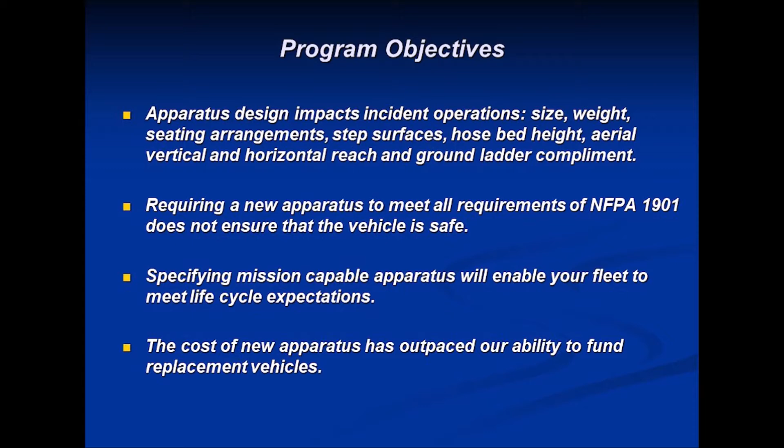Finally, the cost of new apparatus. Historically, fire apparatus have increased in cost about 3 to 4% each year. Starting in 2005 with EPA requirements and changes in diesel emissions and particulate products from the exhaust system, apparatus between 2005 and 2010 increased probably 8 to 10%. And as a result of the pandemic, a lot of the apparatus component parts we're using are exceedingly difficult to get due to supply chain issues, so the overall cost of your unit, as you'll see shortly, in some cases has outpaced our ability to fund it.

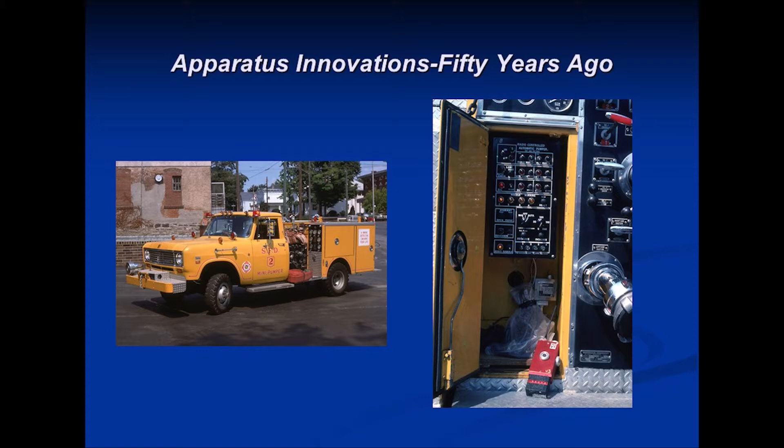The image on the right is something that was developed between the city of Syracuse and Fire Research Company, where the chief of the department, Chief Thomas Hanlon III, worked with the late Jack McLaughlin to develop a radio-controlled pump with a hand transmitter that, as each attack line came off, the nozzleman would have that in his pocket and be able to control remotely from inside the building the operation of the valves on the pumper to be able to send the water.

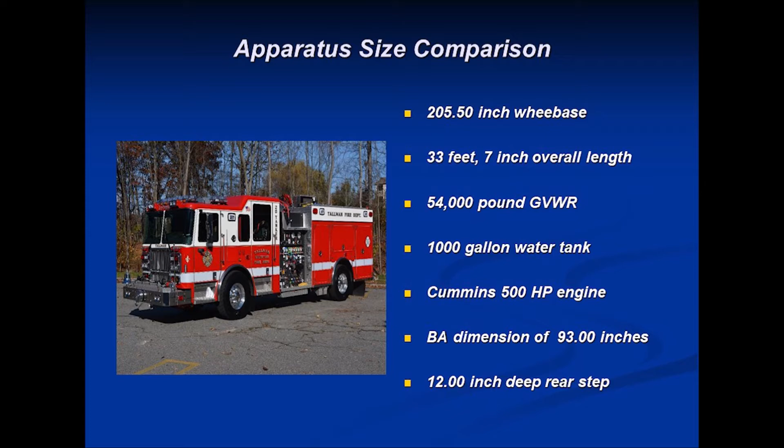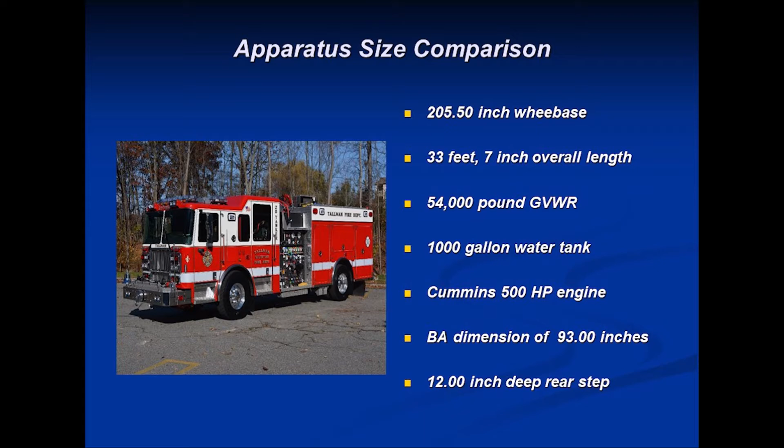A more modern version is slightly larger. Now the unit is just under 34 foot of overall length, 54,000 pound GVW because we want to put more water on it with a 1,000 gallon tank, and 500 horsepower. In an effort to keep the unit short, because bumpers have become extended, we've taken that dimension and reduced the rear step. So in a lot of cases, that rear step isn't something you can even safely stand on when you're going to rack and attack a line.

One of the things from an operational standpoint, Tom, where you're going with all this too, is to look at - bigger is not always better. You need to know your first due area and base the apparatus needs on that area, which is something we're going to discuss a little later on. But again, it's important not to get in that trap that bigger is better. Make sure you're speccing your apparatus and designing it for your first due area and your needs.

If you look at access to social media today, whether it's a Facebook platform or the manufacturer's website, you can look at a vehicle and it might look like it's going to work well. One of my taglines, Chief, is that every fire truck I ever designed fit on an 11 by 17 piece of paper - it looked good on paper. When you go there for the final inspection and go to tape it...

In many cases, just initially working with apparatus committees where they're replacing a 15 to 20-year-old vehicle that was a modest size, because they kind of think this is the physical size of the vehicle we need, I've done nothing more sophisticated than taking a tape measure and chalk, and we chalked that out on the apparatus room floor and said, this is how much bigger your vehicle's going to be.

So some people can conceptualize that on a blueprint. Other people would say, well, 26 feet is okay, and 33 or 34 doesn't fit. I actually heard one member say, well, as long as it fits the firehouse, it's going to work. It's going to look good if it sits in the firehouse. It might look real good in the Memorial or Labor Day parade running straight down your main street in town in a parade formation - might not get around the first due response area very well.

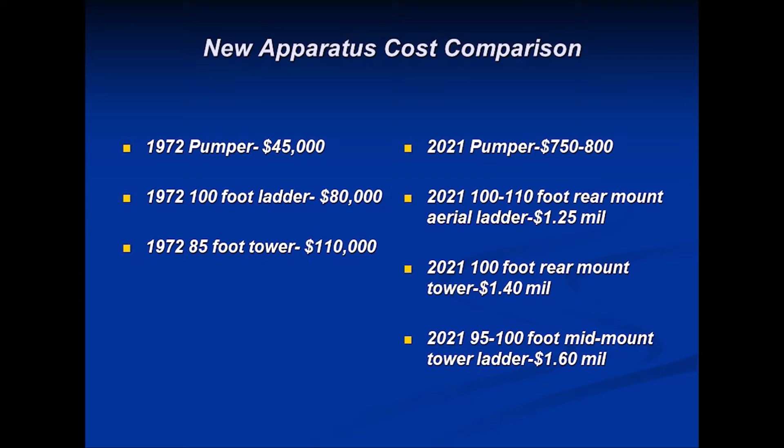When you go in front of your municipal financial folks and tell them you need $800,000 to buy a fire truck, you have to have a pretty good reason to be able to justify that expense, and you just can't go out and say, well, we need it and here's why.

And a big part of that is planning and predicting too. When we talk about the financing, some of the projects that Tom, you and I have been involved in, or myself personally, involve having that apparatus plan, that financing plan, but also having it flexible enough to realize the changes in the economy. Some of the discussions we had earlier this morning about supply and demand with materials costs coming up - being realistic with those projections and making sure we're planning for it, and we keep a funding stream available so we don't get into that situation behind the 8 ball.

Exactly, Chief. There's very few fire departments that the chief and I have ever gone into where we ask, do you have an apparatus fleet replacement plan? And everybody will say yes, and then we ask, well, how long do you want them to last? For whatever reason, the most common response is, well, we're looking to get 20 years out of it, a combination of frontline and spare service. And you look at the age of the vehicles, and you look at the average age, and you go, well, your average age of your frontline engines is 22 years, so I guess we're not replacing them at 20.

In today's modern fire service, particularly in county departments, a reserve unit is really somewhat of a misnomer. It's an additional unit that on any given day is at a station somewhere filling in for a unit that's out of service, for training, for warranty work, or routine preventative maintenance.

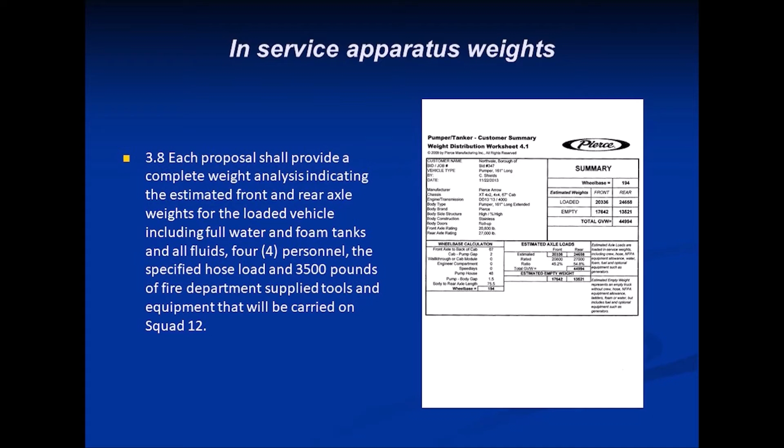Well, we got questions back from vendors saying, you realize the NFPA says it's only 2,500? Yeah, we realize that, but that's no different than saying for my age and height, this is what I should weigh. Well, when I go to my doctor, the first thing the nurse does is put me on the scale, and I joke that I already know what the number's going to be and I'm not going to like it. I weigh more than I should. Fire trucks are exactly the same way. It's not important until it's important, when you get involved in an accident. The first thing that happens is they impound the vehicle and weigh it. So you should require this on each new apparatus, as well as weigh each vehicle annually.

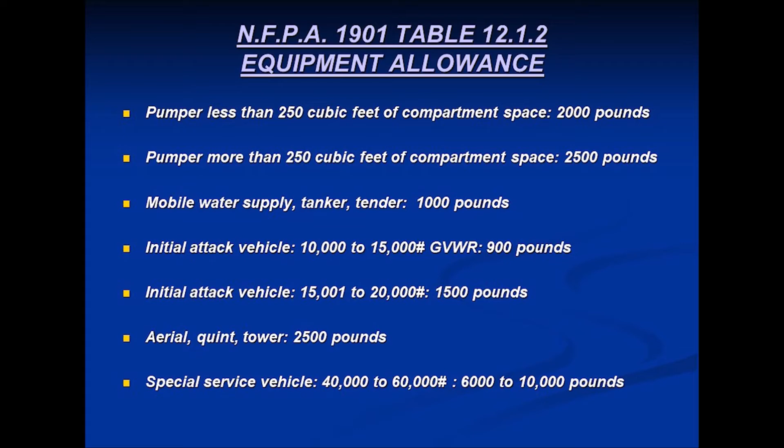This is the chart, and it's been in existence for a number of years, since 2009. Whether you're buying a pumper, rescue engine, rescue wagon, any kind of tanker, initial attack vehicle, or aerial, these are the minimum weights listed in NFPA 1901. It's the responsibility of the fire department, the authority having jurisdiction, to tell the vendor how much weight they're going to carry. Failing that, manufacturers will defer to this minimum number, which may or may not work for you. 2,000 pounds on a pumper, exclusive of ground ladders, hooks, and hose load, would probably work. On a rescue engine, 2,500 pounds is generally well under what's needed, and the majority of aerial apparatus, particularly if it's a straight truck, not a Quint, will carry a lot more than 2,500 pounds. So for a number of years, the NFPA 1911 standard has been vitally important, regardless of the age of your vehicle, who built it, or how you're using it.

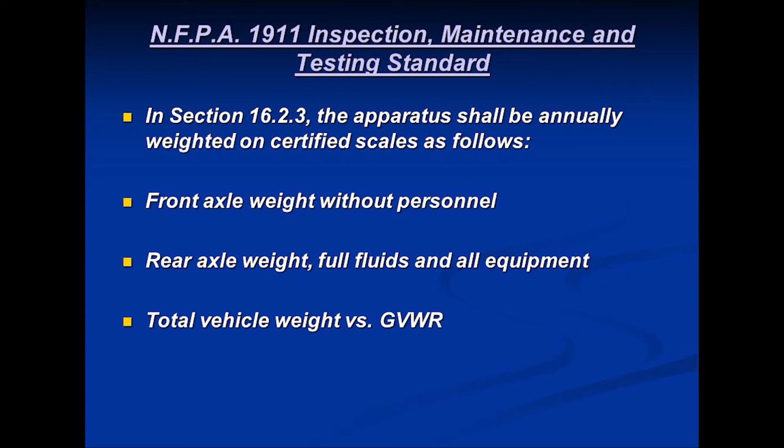Annually, it needs to go to certified scales, have the front axle weighed without personnel, rear axle separately, and then the total gross vehicle weight rating. You take those numbers and balance it out. Here's two examples with two different manufacturers.

The tags will be somewhere inside the cab in the driver's compartment, maybe on the door, on the side of the engine box, sometimes on older units behind the driver's seat, so it's tough to find, but it will tell you what the original ratings are. If you don't have that information, you want to get it, record it, and without fail, weigh every vehicle in your fleet.

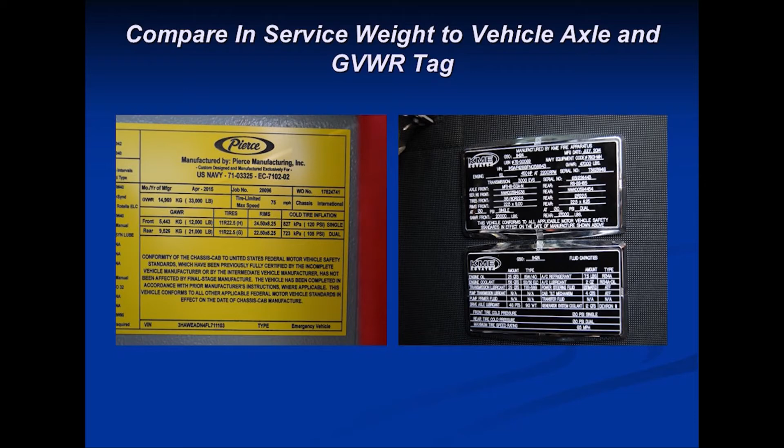For what it's worth, with some of the work we've done with emergency vehicle response prior to the pandemic, because this type of work ceased due to travel restrictions, but in the preceding 18 months, we ran the stats, and 34% of the vehicles we looked at, regardless of type, make, manufacturer, or color, were overweight on the front or rear axle, and in several cases overweight on the front with no one in the cab. So in general, we have not done a good job of policing ourselves with respect to overweight conditions on our apparatus.

So why are they important? Because whether you get cut off at the intersection and end up sticking the front end of your engine into a building, or you flip it on the road in wet conditions, it's a combination of bad conditions, maybe an inexperienced driver or an overweight vehicle.

But here's a couple of practical examples. This particular rescue engine was built with a 21,500-pound front axle. At that point, that was the heaviest axle available. If that rig were built today, they'd put a 23,000-pound front axle under it. Well, when we had it scaled, it weighed 21,720 pounds with nobody in the front, and it had seating for 6. The rear axle had a rating of 31,000 pounds. You can see what it weighed.

As the gentleman was driving the rig out, the members said a couple of guys had been complaining, saying the rig kind of pulls a little bit and it's not stopping real well. Well, it's pretty obvious, because even with 2 or 3 people on it, it's overweight front and rear, and just patently unsafe.

Another example of someone who tried to save a little money: in this particular village in upstate New York, they couldn't afford the vehicle with some of the features they wanted. So it was originally bought and designed with a 21,500-pound axle, again the heaviest available at the time. Today, that vehicle would have a 24,000-pound rear axle on it.

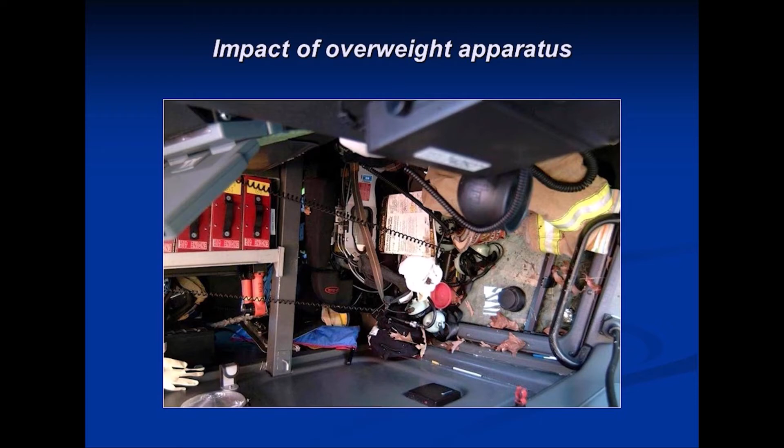So overweight apparatus matters, because when it goes upside down—a lot of people complained about the NFPA requirements to have everything either enclosed in a compartment or in a 9G rated bracket, but it's important. We go through an intersection and somebody cuts us off, and you look at the amount of front end damage—the bumper pretty much came off that rig, with a bit of cab intrusion where the cab collapsed into the officer's compartment.

Back in 2009, prior to that, fire trucks could go as fast as we wanted them to go. It would be one of the questions at pre-construction—they'd ask, how fast do you want to go?

60, 65, 68 - most tires are speed rated to max out at 75 because that's the application in over-the-road trucks. Well, in 2009, because in the preceding years we jettisoned a lot of tankers and tenders along the way, the NFPA 1901 committee...

changed it and said anything over 50,000 pound GVW, so that's any kind of tanker, any aerial device, single or tandem axle, and in a lot of cases rescue engines, we're going to limit you folks to 60 miles an hour in an effort to hope that you're going to slow down and not end up like this. Now that was kind of a knee-jerk reaction to say, okay, we're going to force you people to slow down.

And Chief, that was the same year they required the seatbelt monitoring system, which, having been in the service like you for a number of years, I found to be somewhat pitiful to think that we couldn't monitor our own good and welfare and say we're not going anywhere until everybody's seated and belted. No, now we had to add a $900 appliance with a little green light or red light to make sure everybody was buckled up, because we couldn't take care of our own folks.

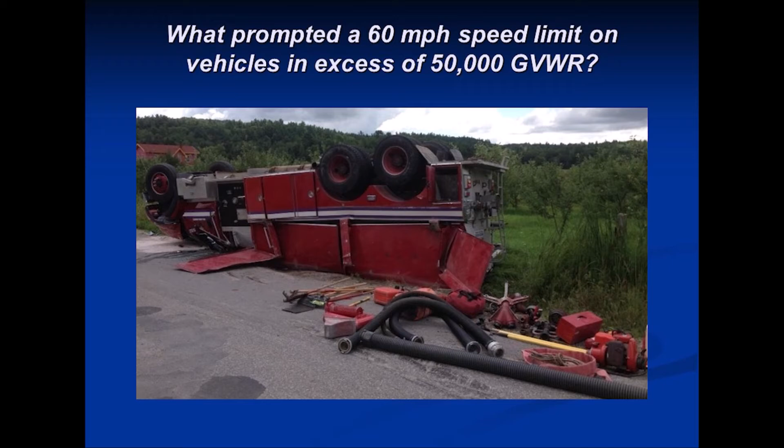So you can go faster than that, but you're going to have to sign a waiver. Every manufacturer, if the unit weighs more than 50,000 pounds, will say, okay, you want to go faster than that? Sign the waiver. Well, who's responsible for that? Whether you're a small organization, is it the fire chief? Is it the fire company president? If you're in a county fire department, does the county fire chief waive that and say, yep, we'll go as fast as we want?

You need to look at the legal liability there. So from a situational awareness standpoint, how big do we need to go? If your department has aerial apparatus, you need to, beyond being able to fit it to the fire station, make sure it's going to go everywhere in your response district, including underpasses if it's a height-sensitive unit, as any aerial device would be, and any weight-restricted bridges or other obstructions - you need to think about that as you're purchasing the apparatus.

You get to that point, in either one of those cases, and it's too little too late, with a very expensive repair.

Tom, just with running routes and knowing the district, even when speccing the apparatus out, changes can occur in the district, even temporarily. If a bridge is changed, or there's a temporary underpass or overpass situation when construction's going on, make sure you take a look at those and stay in touch with transportation agencies, because it may only be a temporary deal, but you don't want to find out about that temporary deal, dear Chief, at 3 o'clock in the morning when it doesn't fit.

Exactly, Chief. For departments that are running response apparatus with CAD, where you have AVLs on the unit and they're picking the closest available units, that's one thing. In other cases where it's run more traditionally and they're assuming you're coming from quarters, but you happen to be out on inspections or doing a drill or any kind of training activity, and you're now arriving at intersections or at the box location out of order because of where you came from - those are times when you need to think about calling the intersection or advising units of where you're responding from. So you might be first due on the box, but you're going to end up being third due because you were way out at the end of your response area, or you were doing a drill with a line pull that's going to take you a few minutes to rack up before you can go. And somebody's not going to be expecting you to be there.

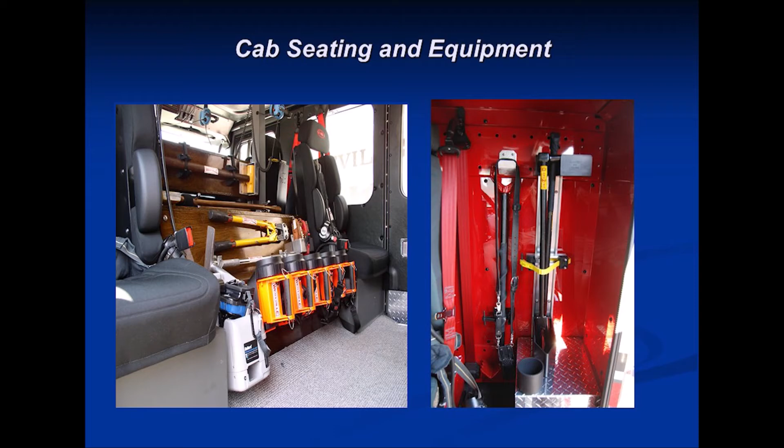If you need to have your forcible entry tools and other things inside the cab, that's fine, but they need to be in a secured 9G bracket, mounted to something secure, and not just the back wall with acoustical matting or vinyl padding and a small thin backboard that's not mounted to something secure within the cab.

So when you're speccing a new rig, be prepared that at the pre-construction conference, you're going to spend a lot of time talking about what goes on inside the cab: dashboard layouts, rocker switch arrangements. Even with multiplex units, you can still do things through a screen or through individual rocker switches.

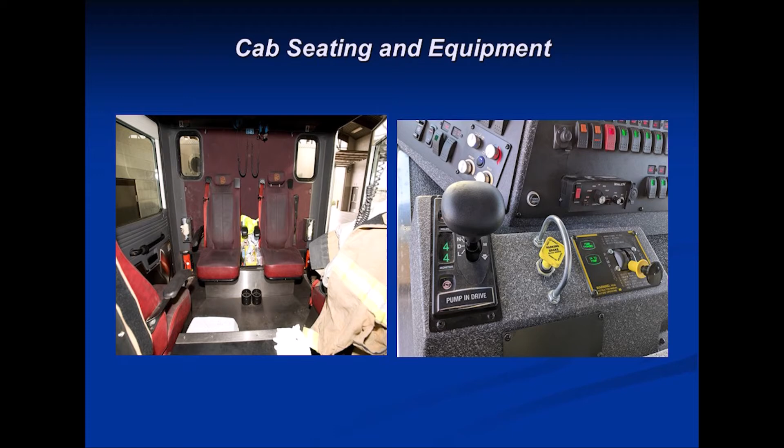If you're operating a fleet of apparatus, it's extremely important that they complement one another, unless there's a complete redesign or a wholesale switch of how you lay out the stuff. That way, if a driver is assigned to Engine 2 one day and picks up an overtime slot on Engine 7, he slides into the front seat and it looks the same.

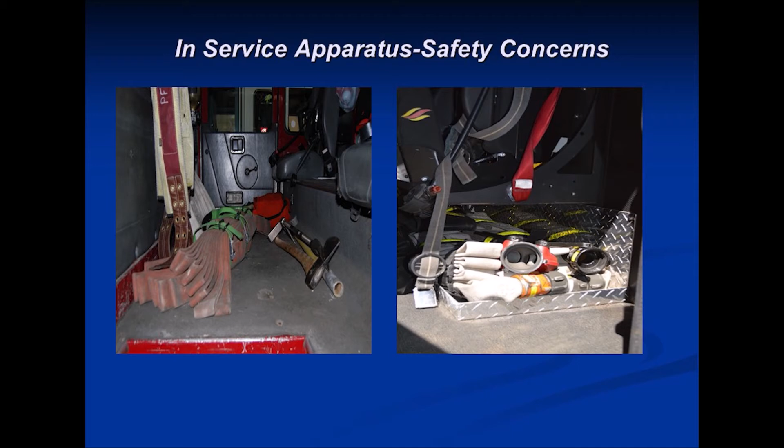Either way, it's not really completely safe, particularly having your irons just sitting on the cab floor. If something happens and you get involved in an accident, that's going to become a mechanism of injury that you'll have a tough time explaining to your chief.

We use our apparatus in all different kinds of conditions. Maryland is less susceptible to snow and ice than a lot of other areas, except up in the rural parts of Garrett and Allegany County where they get a fair amount of snow. But we operate rigs in all kinds of conditions.

We can't always tell Mrs. Smith that we'd like a nice dry road. So you look at cases where you slide off the road with your rig, or a unit actually going out on a run in New Jersey taking in an automatic alarm ended up taking out the motor and a bunch of electronic components.

Fire trucks are not designed to operate underwater. There have been a couple of articles recently in trade journals about a department, I think down in Texas, that designed all their engine companies to operate in high water because their community was very prone to flooding. So you have to look at where your air intake and air cleaner mechanism is on your rig.

If it's down low, in front, and on a lot of rigs typically down on the right side underneath the officer's seat in the cab, that's not designed to run when you can no longer see the top of the tires on the rig. You're going to destroy the rig and take it out of service.

So we're going to spend a few minutes talking about stepping surfaces. For a number of years, the NFPA has required non-slip surfaces, tread plate, that typically has little raised diamonds and groove marks in them. That's okay, but again, that's the minimum.

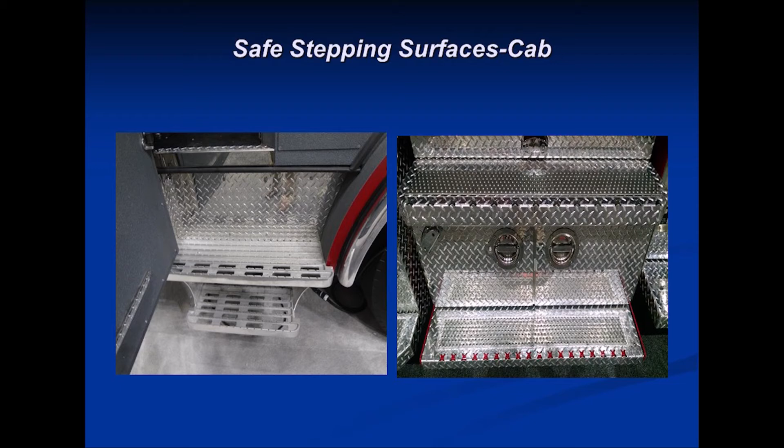So again, other examples of open grip strut steps. If you look at that particular cab design with the narrow, because they wanted a real short cab, you look at that step, you're not going to be able to see that coming out of the cab if you're facing the street side. You're going to have to back out of that cab and hope that you hit those two small little steps. So again, there's examples of, does it meet NFPA 1901? Yes. The 1901 has a minimum square inch area of the step surface, that meets it. But if I've got a choice of getting in and out of the cab on the image on the left versus the one on the right, I know which one I'm going for.

People that are enamored with top mount pumps, right, where you have a walkway, you can see the example there - the NFPA has height restrictions from the ground to the first step, anywhere around the vehicle, whether it's an engine, a rescue engine, or any kind of truck, can't exceed 28 inches, 24 inches. From there to any other point on the vehicle, the steps have to be on 18-inch centers. So if you look at the example on the left, they had the step, they had that little compartment underneath the walkway for the top mount pump, and now you have to have a little fold down step because the height of that compartment was 24 inches, so they needed to have that step there.

The step surface on the other image is busted, it's open grating, so if you get in an area where you get snow and ice buildup, that's a very aggressive stepping surface, non-slip. Snow and ice will fall through that rather than build up on the tread plate and eventually ice over.

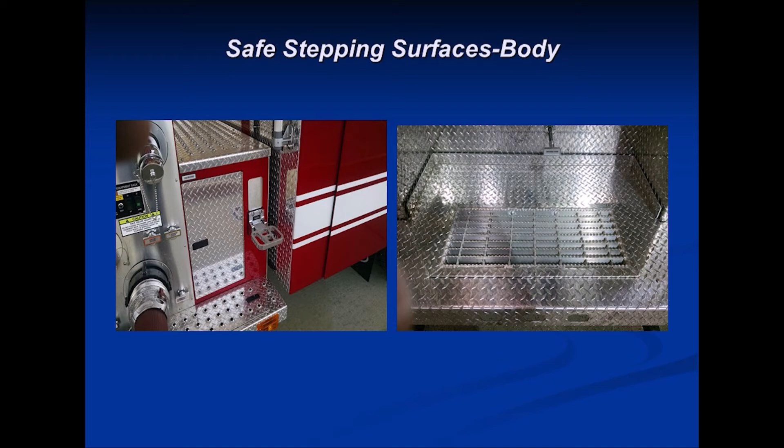Yeah, Tom, one thing with the steps that you're talking about is, again, we're designing apparatus and even evaluating our current apparatus. It's one thing to look at them at the show floor someplace, and I know you'll agree with this, it's one thing to look at them on the show floor, the drawings, and look at some other people's apparatus, but to actually have somebody climb up to some of the top mount pumps, or get to the top of the dunnage area, or the back of the hose bed, wearing a pair of bunker pants and some gear, because those times we're at the shows, we're climbing up in this stuff wearing shorts, tennis shoes, t-shirts, not in PPE. It changes that whole dynamic.

Right. This is probably one of the areas that when you're designing a new vehicle or looking at your current fleet - again, this is where the NFPA says you have the step requirements of 24 inches and then 18 inches, that anything above that then needs to be illuminated and that has to have a handhold. That's why you'll note in these pictures that the folding steps are open, all right, because it does two things. It's supposed to be the stepping surface, and as you're walking up, you put your gloved hand through that.

And as the chief alluded, you look at these, and they're NFPA 1901, they're street legal, right? Why you would want to design something and have your hose bed up 80 inches in the air, I'm not sure. But you're going to climb 1, 2, 3, 4, 5 steps after you get on the rear step to get up to the top of that rig to flip up the tread plate hose bed cover when you go to rack your attack line. Even with the master stream device, and a few engines that I've been involved with, it looked real good in concept, or when we were doing the factory acceptance, the steps to get up, they put the master stream device in operation.

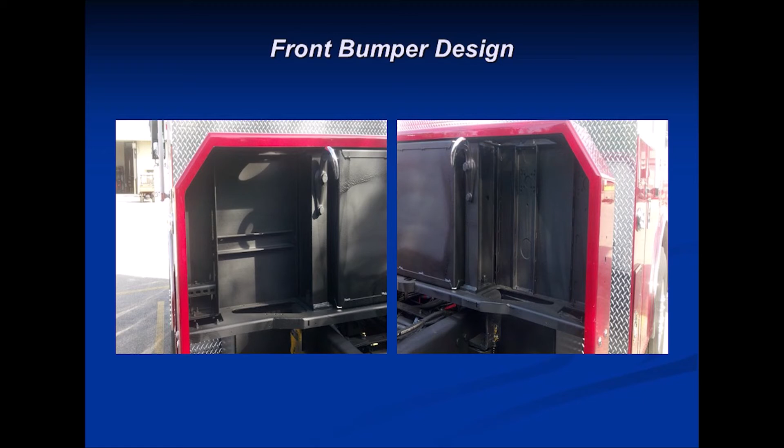Looking at it with the bumper and the structure, if you're doing those modifications, you want to carry a lot of the stuff up front, making sure it doesn't hinder the integrity or strength of that front bumper. So here's an example — this is what a front bumper extension looks like before it gets built up, but you can see the reinforcement where it goes back to the center part of the frame. That's what you want to do.

So with aerial devices, let's spend a few minutes on those. Back in the day when Chief Baldwin and I started, there were four choices of aerial ladder lengths: 65, 75, 85, and 100. It was pretty easy to remember. Then a couple companies developed a new design device with a 110 foot, which was well accepted in the fire service. So what does your community need?

Are you buying it because you need the vertical reach due to the height of your buildings, or because of setbacks and you need more horizontal reach? Based on the outrigger stance and how big your vehicle is, it goes back to our very first point — that's going to determine how much turf you need on the fire ground. It's really about knowing the needs of your community and matching that with the right device, knowing the true horizontal reach, the jack spread setup, the weight, the angle of departure, and being able to get the apparatus around the community based on your needs.

The outrigger stance on aerial devices today can go from as little as 12 feet on a 100 or 105 foot rear mount ladder with a 500 pound tip load. On some certain platforms it requires a 20 foot stance on the outriggers. So what does your response area look like?

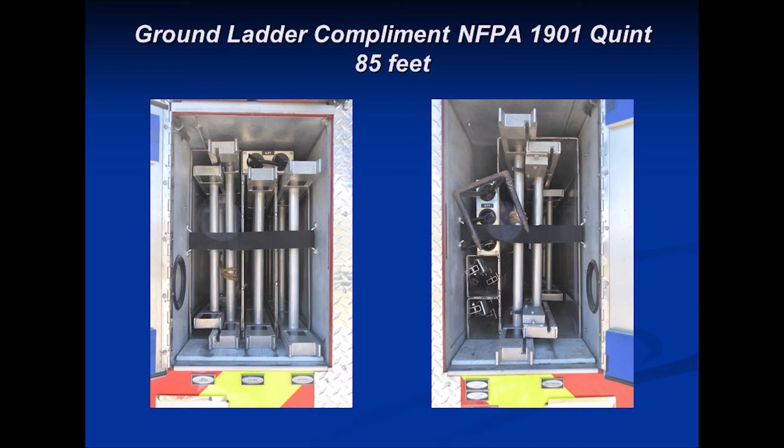We then went out and bought a $1.2 million Quint, double the price, and we get 85 feet. If you want to carry 85 feet of ladders, you should do what the Chief's vehicle does down here in Stafford County: buy an F-250 pickup, put a rack on it, and throw the ladders on top. That's a lot better use of public money than taking $1.2 million and showing up with one ladder that's longer than anything an engine company is going to show up with.

And if it's a standard truck, non-Quint, it's only 115 feet. Why do we do that? Because unfortunately, single axle and tandem axle Quints in many communities are more common than a straight ladder, whether it's a rear mount or tower. Tillers, even folks out on the West Coast are buying what they call quillers, because they have a pump and tank on it.

So you want to think about it, no different than an engine company. What length of attack lines and what do I need to be able to carry to meet the objectives in my response area? Same thing with your ladder truck. You're buying it because they call it that, a ladder truck. I'm not interested in something that carries more hose and everything else.

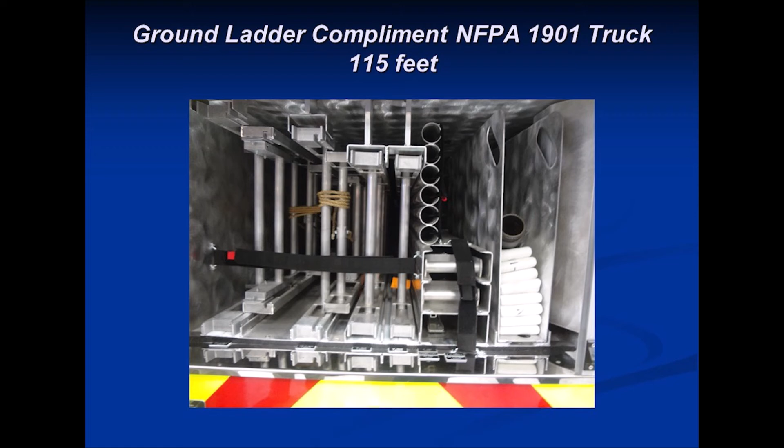And you look in this case, we got a rack of 3-inch, we got some old-fashioned D hooks, and we got hook pike poles. So everybody comes off, the truck's got their own pike pole, but we only got one 35-foot ladder to throw. So if you can't access more than 2 sides of the building with your aerial device, you better hope Mrs. Smith, or more importantly, if one of our brothers or sisters gets jammed up on the 3rd floor and needs to bail, that 35-foot ladder went there, because there's only one showing up unless you've got a better equipped ladder truck. That looks something like this.

Carefully look at and evaluate what ground ladders you need, and don't ever let a potential apparatus salesperson come into your station and say, well, the minimum is this, and we can do that. As much as we talk about horizontal reach and the jack spreads and setups with the aerial device, when the truck comes in, the ground ladder is just as important.

More is better. Having what's right for your community, looking at your community, maybe there's 2 in the front but 3 in the rear, garden apartments, what your needs are, what your exposures are. In all the projects I've been involved with, there's always the discussion that we don't have enough people to throw those ground ladders. Maybe not arriving on the apparatus initially, but as additional companies come, additional personnel show up. Again, making sure all sides of that building are laddered, not only for occupant safety, but ours too, having them there and available.

Absolutely, Chief. As a probie, I was taught you keep throwing ladders until one of 2 things happen: all sides and all elevations are covered, or you run out of ladders to throw. And exactly, if you threw all the ladders on your piece, you look for anything else that's on the fire ground and still got them, and throw them. Because they're there for our safety.

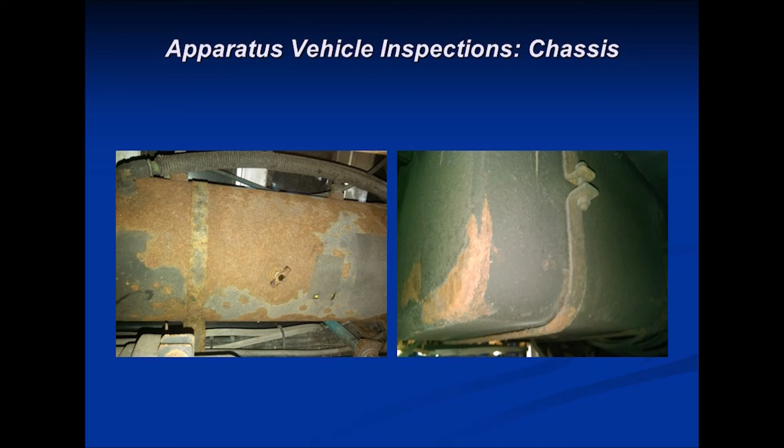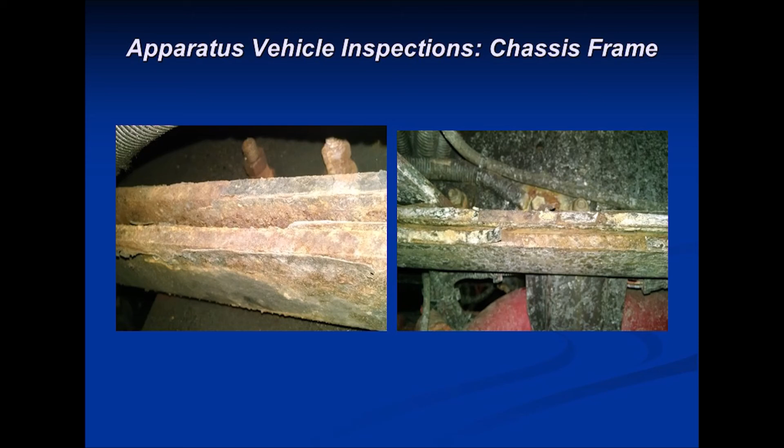So think about where you have areas of concern. Get underneath your rigs. Every fire station should have a creeper - if you don't, go buy one. Get underneath the rig, get your technicians or chief engineer to check out what's happening there. If you've got a double frame rail rig and you're getting frame jacking caused by corrosion and lack of maintenance in some cases, that needs to get identified and fixed while you still can.

It's important to get underneath the rigs. Even from a chief officer standpoint, every once in a while it probably wouldn't hurt to put a t-shirt on, get out of the white shirt, just so you can see what your fleet looks like from the underside. Everything may be shiny up top, but it's a disaster underneath.

In some jurisdictions, people take a lot of great care and pride in their apparatus, on the top side as well as the bottom side. Unfortunately, most of my practical experience has been the top side might look really good, and when you get underneath or start looking at tires - tires by DOT guidelines have to be replaced at 7 years.

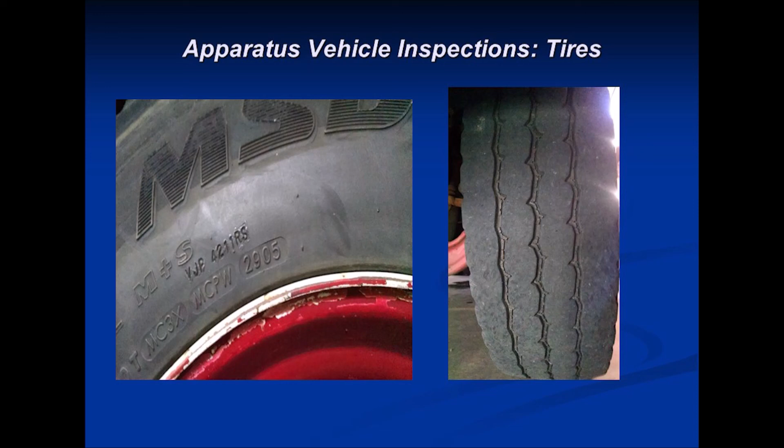How do you tell the age of your tire? You look at the serial number on the tire - 2905 tells you that tire was built in the 29th week of 2005. We've seen vehicles that were 15 years old and still had original tires on them. People say the tread depth looks okay, the old Lincoln penny test says it's fine. It doesn't work. You need to keep up on those kinds of things.

Look at your rigs. That's an SCBA compartment door, a vendor component. That's what it looked like after 20 months in an upstate New York department, because it was poorly designed and constructed. It's cheap, but it would have been much better off requiring a stainless steel hinged door.

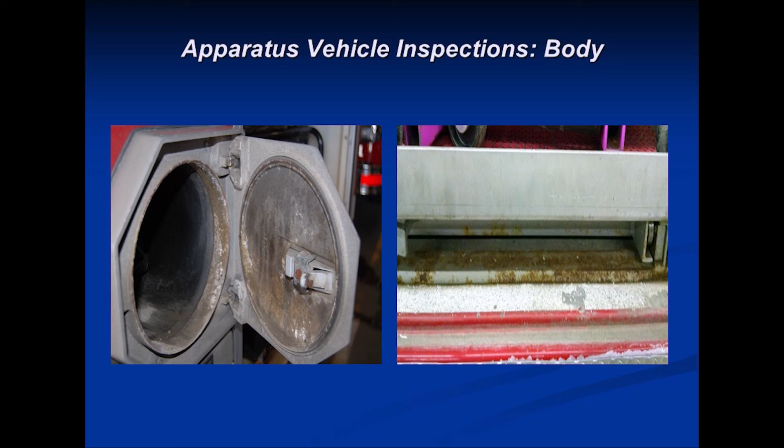That slide tray photo on the right is a steel mechanism with an aluminum body, but that's what it looked like after 2 years, because the gasket material on the roll-up door had worn out, and salt and corrosion intrusion got in there and everything's rusting. That's what the gasket looks like. The gaskets on roll-up doors are fine, but they require maintenance - they need to be adjusted and lubricated. When you don't have that seal, and it's already shredded, that's another example.

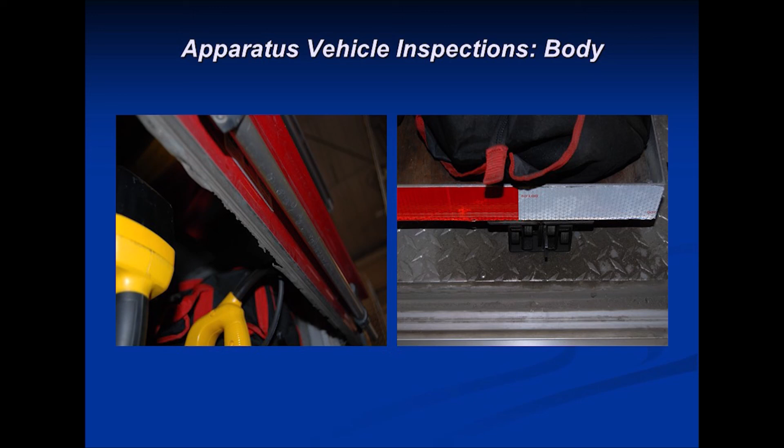Then you just get dirt and intrusion into the compartment, and you wonder why your rescue tools or whatever you're carrying in there looks like heck. Aerial apparatus needs to be inspected annually by a nationally recognized company.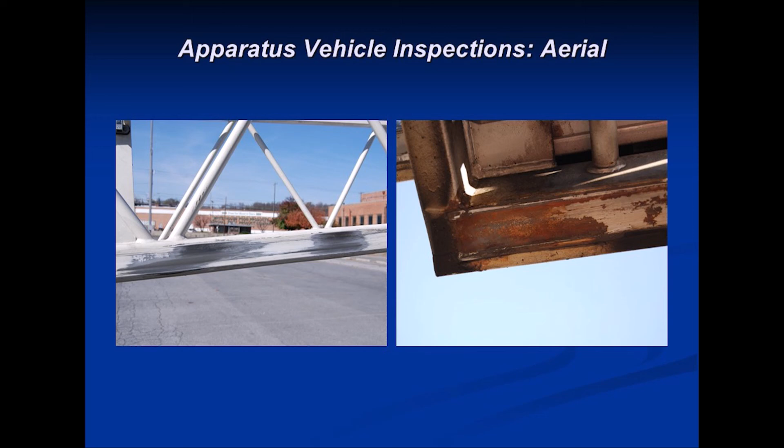There's all kinds of aerial testing companies out there. Some people do a great job and follow all the requirements in 1911. Others don't do such a great job. That example photo on the right was one that had recently passed from a testing company and had numerous other issues, including heavy rust and corrosion, yet those people had issued a certificate of compliance saying keep running this, you're good for another year.

Why is preventative maintenance important? Because sometimes it goes beyond tragic. Lieutenant Kelley gave his life in Boston because of a failure of brakes on that rear mount ladder and went into a building and killed himself. Not of his own volition, just the lack of maintenance, that hopefully has been addressed.

The tire and wheel assembly came off that engine because the lug nuts weren't torqued. The unit was new. Everybody thought, well, it's brand new, doesn't need any maintenance, right? It had been delivered across the country, and the wheel and tire came off, with somewhat dramatic results.

You're talking about the maintenance and even just looking at it, the inspections, the things you think about over the years. I worked for a small department as an apparatus driver through college, and I never understood why the chief had us -- you brought the rig back and got it washed, and that included climbing underneath with the hose and washing off the frame and everything else. But his point was, if you're climbing underneath there and washing the thing on a regular basis, when you came on shift, you checked the apparatus, you washed it, you did that stuff. For an 8-hour shift, it would take probably 2 hours to do 3 pieces, or maybe longer, but you were looking at the rig and looking at stuff.

That one aerial shot, when you were talking about the aerial testing, that was on an in-service vehicle. So when people are looking at apparatus, pay attention to detail, looking at the rigs. It may seem like tedious work at times to wipe stuff down and wash it and climb under the rig, but you're looking underneath, you're seeing those things, which you just don't see if you're not walking around it, throwing your gear on and walking away from it until you start it. And then you have to run the call with it.

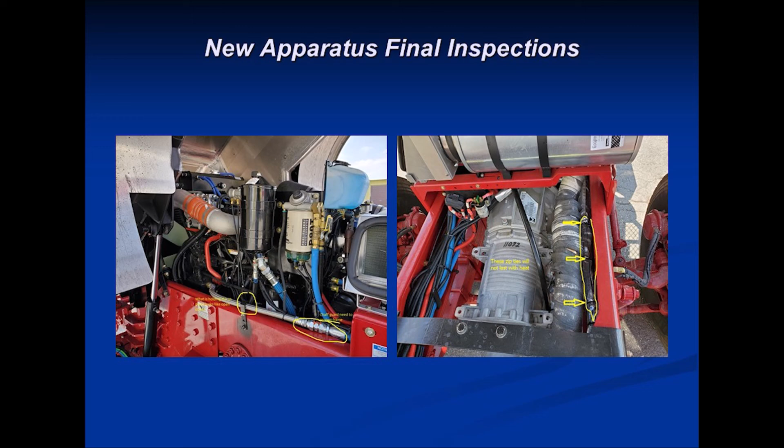Virtual inspections are exactly that -- they're virtual, and you may catch some things and you may not. On most of the ones that I was familiar with, we'd identify anywhere between 24 to 36 items just based on looking at a picture. That is not representative of being able to go out there to do it in person and to operationally test the rig, to road test it, to pump test it, and to do everything else.

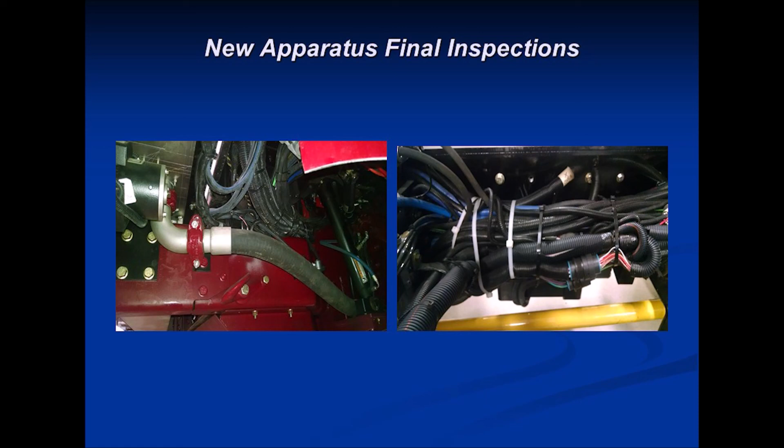Other examples: an image on the left shows a 2-inch discharge going up to a chicksan swivel for a front bumper pre-connect. It's being chafed and resting right up on the front frame extension. The example on the right shows a gazillion wire ties holding that whole electrical harness together, and if a couple of those fail, they're dropping down onto the yellow PTO shaft for the hydraulic pump.

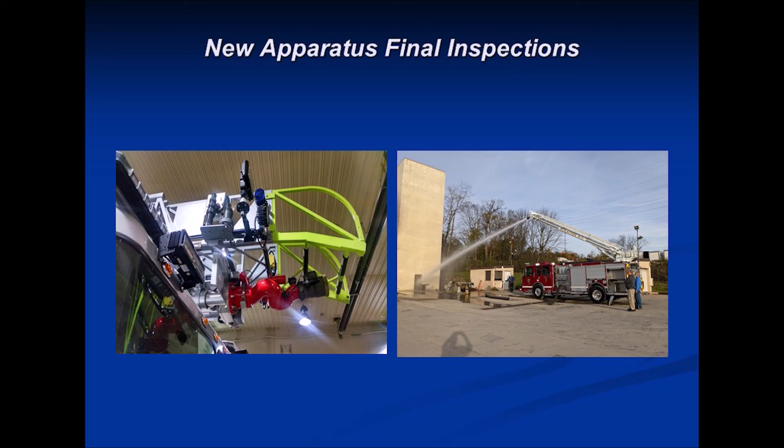You can specify that you want an aerial device's master stream to raise above the horizontal, and the device might be capable of that, but most manufacturers use different lengths of bolt-on extensions on the end of the aerial. That developed because previously, if you damaged the end of the aerial, you'd have to replace the whole fly section, so now they use replaceable bolt-on sections. Be careful: if you have a pinnable waterway on the unit, make sure the extension of that bolt-on device doesn't limit your ability to raise the monitor nozzle above horizontal. With everything mounted at the tip of the aerial, make sure obstructions don't prevent you from reaching a window area. At final inspection, always insist on pump testing and flowing water through the device.

To wrap up, we hope we hit a number of interesting areas for you to consider. For me, being more of an engine guy, that's a great day to be in the engine — you've got a lot of hose, a lot of work, and you know everybody puts out max effort to do it. And if you're in the ladder company, you've got that many brothers and sisters to get to the roof. God bless you, man, you're having a great day — you've got A-plus-plus staffing in the truck.

Think about it — this was one of the greatest slogans I've ever seen on the side of a fire truck, a small department on Fire Island, Long Island: it's just common sense and water. If we could distill a lot of what we do each day when we come to work or run a call, it's just that simple.

A very good close friend, Andy Fredericks, used to say that quote. Where I came from in upstate New York, Tuesday was garbage day, and you never saw the garbage guy get excited when he came around the corner. We had the second house down on the block, and he didn't get excited seeing the trash and recyclables out there. Expect a fire on every run. I know we're a fire, EMS, and rescue organization, but we need to be on our A-game — have well-designed apparatus, well-trained people, and expect there to be a fire. Don't think anything less.